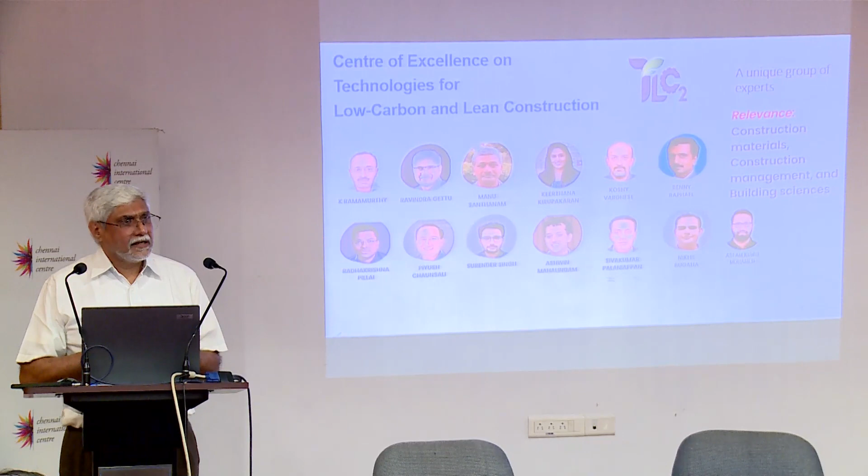A lot of young people - our average age would be about 40. I'm sort of one of the oldest. So we have a lot of young people with a lot of enthusiasm who make this group work.

So our mission, we have set for ourselves a long term mission to look at zero carbon, zero waste in construction. We want to reach a state, ideally, where we will not have any carbon impact, carbon footprint - low impact, low environmental impact, zero environmental impact, and almost no wastage. Nothing goes out when we are demolishing or reconstructing - we try to put it back into the construction.

Now why is this important? If you look at the carbon footprint, environmental impact, it is said that 40% of all the environmental impact in terms of carbon footprint comes from the construction industry. So it's huge - just one industry is responsible for 40% of the carbon footprint.

Out of that, if we have to break it up, about a fourth is operational - that is your air conditioning, lighting, heating if you may. But the rest, 75%, is embodied - that is, it lives with you, the building, the bridge, as long as you have it.

So our idea is, how can we reduce this? Because this operational part, we can make it more efficient - we can use less lighting, more efficient air conditioning, and so on. We want to reduce this 75% as much as possible, try to make it as close to zero as possible.

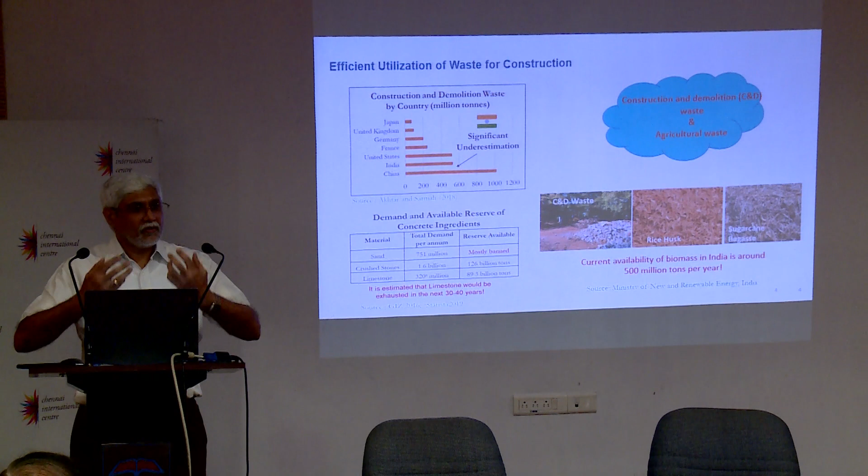We also have a lot of agriculture waste. So we are thinking, can all this be put together? Can we take waste from one sector and put it into construction, making sure that anything demolished goes back into the construction itself?

Durability is very, very important. It's something we neglect a lot. We look more at the cost initially, how fast we can construct, and then we walk away. But durability is very important, and we cannot talk about sustainability without talking about durability. Then would come demolition, C&D waste, and so on.

So some quick examples of things we have been doing. We've been looking at how to recycle concrete. We take concrete, and in this case, we zap it with solar energy. We had a huge dish that would concentrate the heat, and the heat makes the concrete disintegrate, making it easier to separate into aggregates and sand and so on.

This movie is not running, let me see. So how do we separate, how do we segregate? This doesn't work, but this is a robot that we use for segregating the waste, because it's always mixed waste. Then we are looking at different types of reinforcement. Instead of steel, which we know corrodes, can we look at glass as a reinforcement? We've also done things in the field.

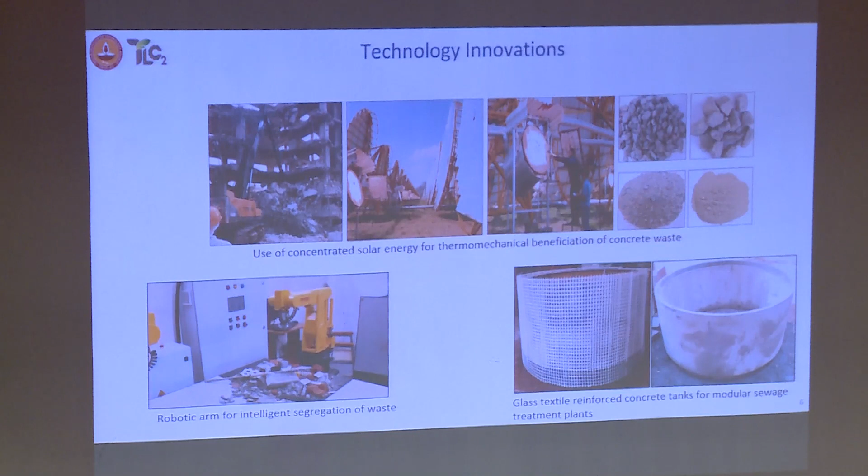It's not that we are just theoretical people sitting in the lab thinking up stuff, but we have done, for example with CMRL, gone and shown them how the pile caps that have to be dumped anyway are reused in their own construction.

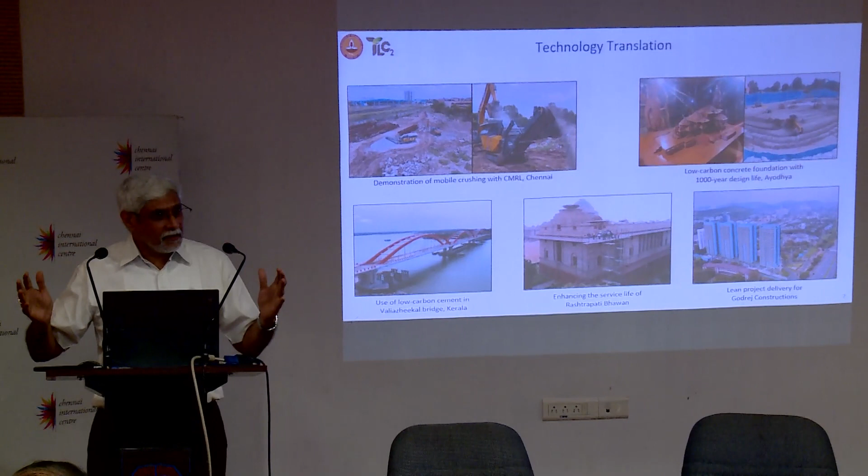We've participated in the Ayodhya temple foundation where a 16-meter depth foundation was done. You can imagine, about 50 feet. The whole temple is on a hole that is 16 meters deep. Because it is silty soil, I can talk about it later, but we had to build it up.

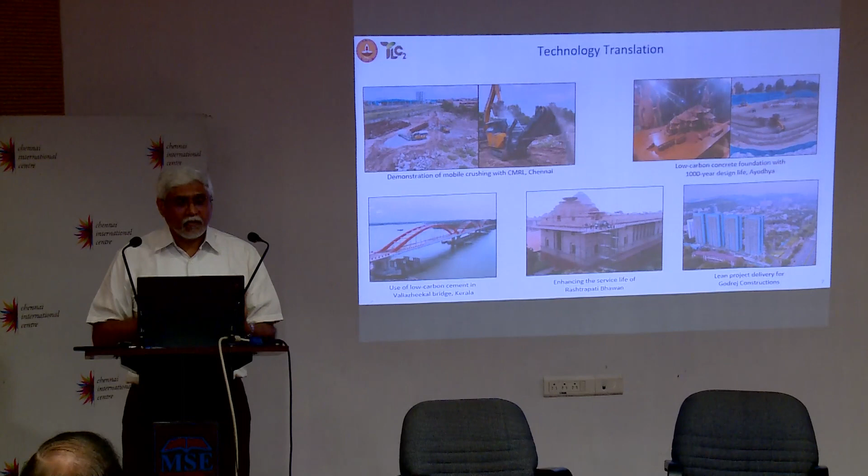Again, low carbon, a lot of fly ash used, very low intensity concrete. We've introduced low carbon cement, slag and fly ash in a bridge in Kerala. The Rashtrapati Bhavan is also being revamped.

There are chajjas made out of lime concrete very early on, which are all deteriorating. So instead of pulling it apart, we've seen how to rehabilitate it. With Godrej, we've looked at lean project delivery.

So all this fits into these sustainability goals. This is my last slide. I want to show that there are a lot of options we have to work on. Sustainability is much more than carbon. When we are talking about all the sustainability goals, we have to think of all these things.

Construction fits into many, many aspects. Construction is responsible for many aspects that govern sustainability, and we have to think about all this. So that's where we are. And in this list, new construction technologies or lean construction technology is very, very important.

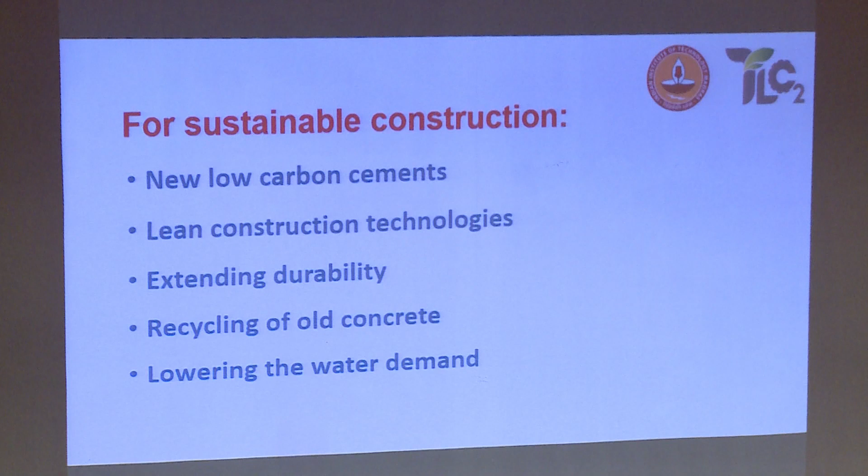So you will hear from an expert from a team that has done amazing work in our country, and you will see how they've taken it forward and what is the future of this technology. I'll stop there, and I have the pleasure that Mr. Hebbar continues and will tell us about these technologies. Thank you.

Very good evening to all of you. I think the expectation is very high. Professor Ravindra, Mr. Anand, Mr. Challa, everybody is telling that a lot of expectations are from this forum. I don't know if I'll be able to do justice, but one thing I'll sincerely try. Most of you must have had a very hectic day, it is very warm outside and a very cool temperature inside, and I'll try my level best to keep you awake till 7:10.

In L&T, we always think ahead of others. I would say we are the trendsetters. If we can't do it, who else can do it? So we challenge ourselves to keep ahead of the market and give solutions for the better future.

In this context, L&T has come out with various solutions in the construction industry. Just before getting into more detail, I'll briefly explain what L&T is about. I think L&T needs no introduction. If I have to tell about L&T, it is like taking coal to Newcastle to this august audience.

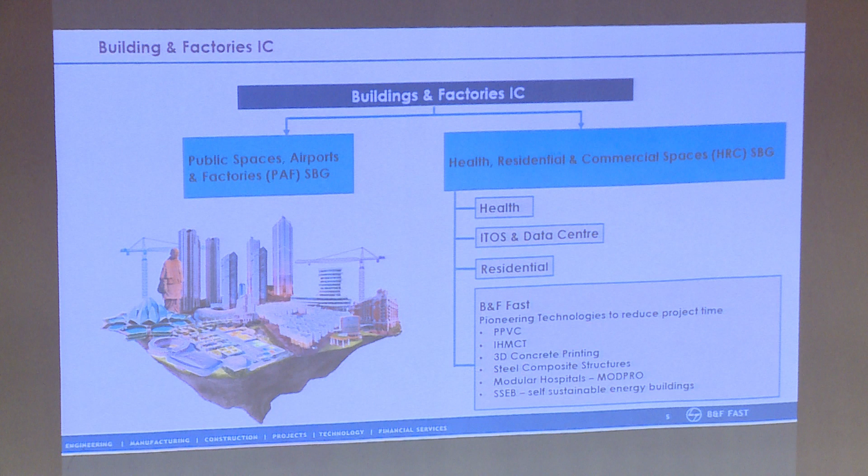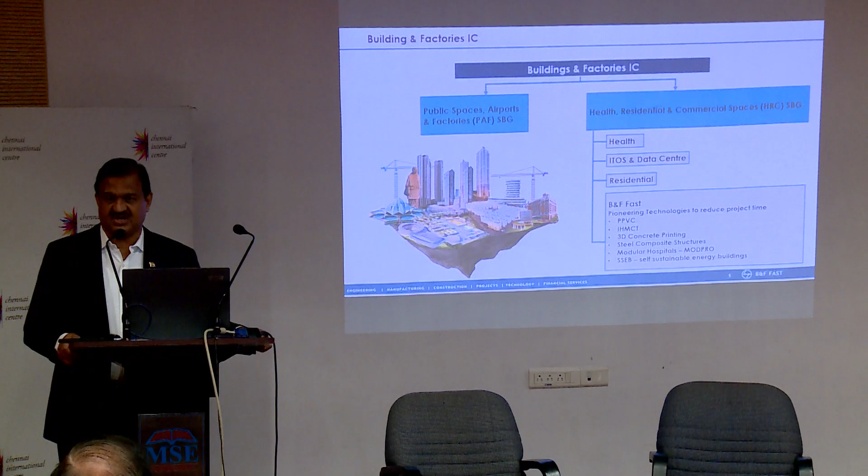One is called 3DCP, that is 3D concrete technology and printing. The second is PPVC, prefabricated pre-finished volumetric construction. We also thought of self-sustainable buildings, still in a very primitive stage, but we are doing close interaction with the central government - for projects at high altitude where there is no electricity, we have to make the building run on its own energy. It's still at research level, along with various other initiatives including steel composite structures.

What is our vision? I'm sure most of you are in the construction industry, architects. Just for your information, I'm an architect by profession, but I'm doing business now. Maybe 20 years I did the design, and for the last 15 years I'm doing business. Engineers, structural engineers, and many of you are developers.

One of the biggest problems we are facing in the industry is skilled workforce. Very, very difficult to get today carpenters, barbenders, and masons, resulting in very poor quality of work. Uniformity is hardly there.

All these things, when we look at it, and on the other side, if I have to compare my product with a machine-made product like a car, you go to the showroom, look at a Toyota car or Hyundai car, see the brochure, see the specifications, and ask for a car. You get the car exactly what is mentioned in the specification, what is available in the showroom.

And now you go to a contractor. Architect has designed the drawings, and then he has given the specification, and go to a contractor and ask him to construct. At the end of the day, you get a building which hardly matches with the specification and design given in the drawing. And the architect is not happy with the contractor, neither the end user.

So why not we develop a product which is exactly the same as a car, in the sense it 100% matches with the specification and the design given by the architect. In other words, I would call it the architect's magic wand. Is it possible? Yes. We have tried our level best and maybe we have reached at least 85 to 90% of it.

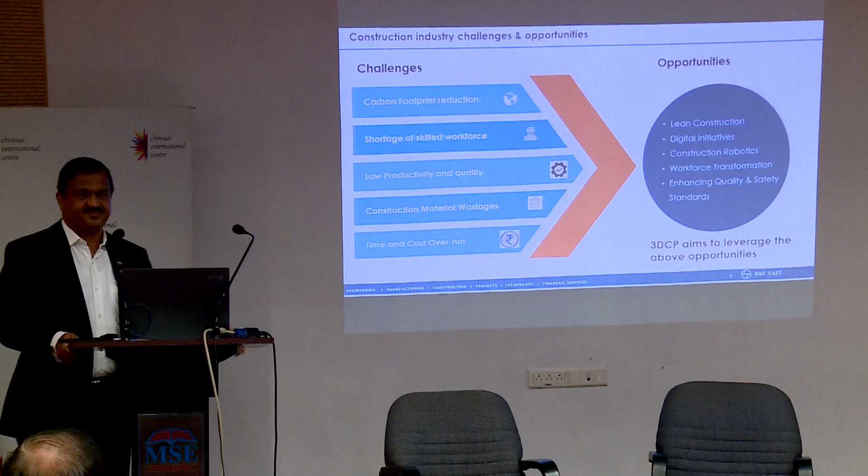Huge challenges we have. It is not as simple as mentioned. Professor Ravindra has given quite a lot of information about carbon neutrality and carbon footprint. Today, if I'm right, construction industry is one of the biggest contributors of carbon dioxide into the atmosphere. Everything we do generates carbon dioxide.

Labor comes from different places. We run a lot of plant and machinery at site, and every resource is taken out of Mother Earth—bricks, steel, everything. So I think we are the biggest culprits. Shortage of skilled workforce, I already told you. Low productivity and also low quality.

Construction material wastage—many times we produce concrete in the batching plant. By 7 o'clock or 6:30, all the labor want to go home, and a lot of product is still available in the transit mixer. It is dumped somewhere below the ground, and it is not getting paid for by the client. Also, at the end of the day, the contractor makes a loss. Of course, that is one small wastage.

A lot of wastage is there, including formwork material. And at the end of the day, it is time and cost overrun. Hardly is there a project which is completed on time. Say 24 months duration for a project, and most of the time, including in L&T, we find it very difficult to complete the project on time for various reasons.

It may not be just because of the construction methodology. It may be because of changes proposed by the client, or maybe sometimes material has to come from abroad and logistics is a problem, but there is a time overrun resulting in cost overrun. So all these challenges—if I have to address them, I'm not saying 3D printing is the only solution, but today, to a large extent, I think that is the way forward.

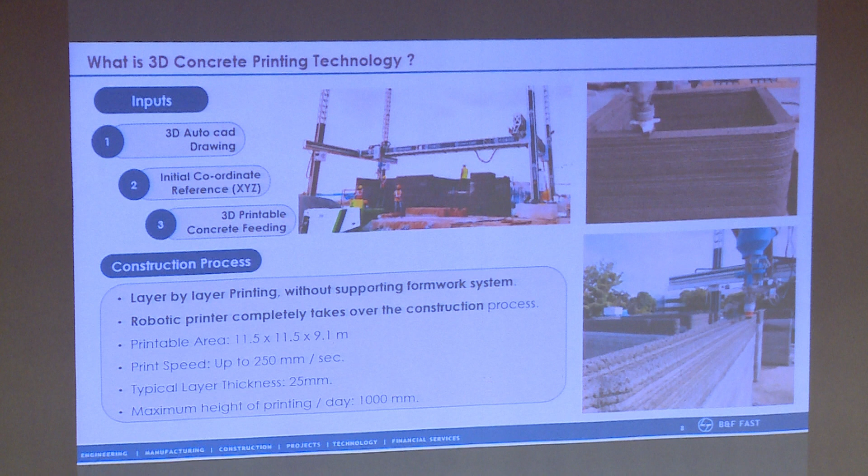250 millimeters per second is the speed at which the nozzle, the print head, works. The thickness of each layer is approximately 25mm, and per day, 40 such layers of 25mm means 1 meter of wall height can be constructed in one day. That means for a building of 3 meters, it hardly takes 3 days to reach the roof level.

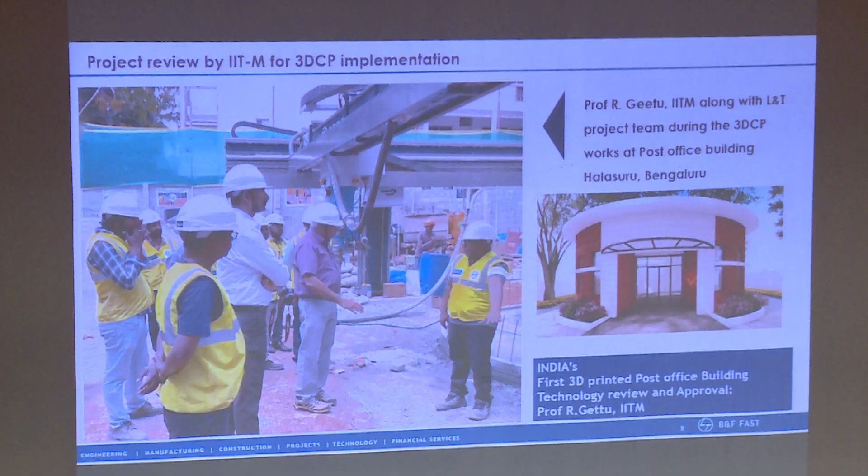That is one of the projects which we have completed in Bangalore, whose photo shows Professor Ravindra at our project site. We did one post office building at Bangalore, Ulsoor Road, 1,000 square feet post office. 44 days was the duration given in the contract, and we completed it in 43 days.

I think instead of me talking, an audio visual will be better.

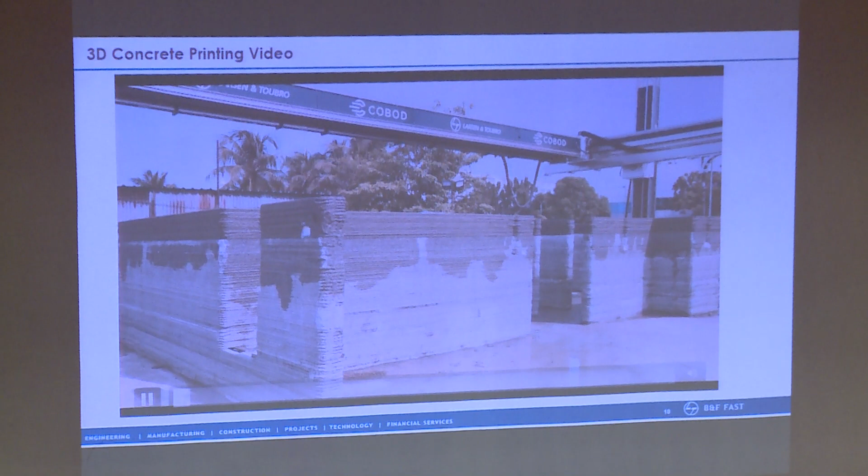With 3D concrete printing, the future of Indian housing. As proof of concept, we first 3D concrete printed a single-story building.

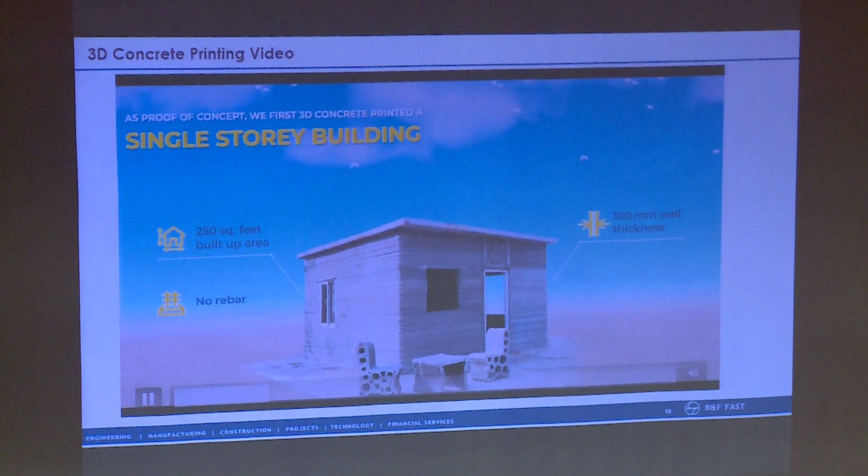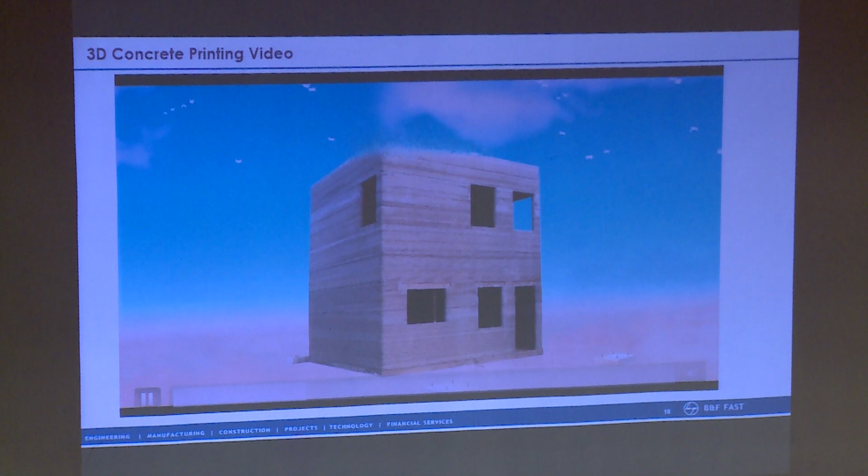Then, we 3D concrete printed India's first ground plus one building. Now, we have 3D concrete printed a full-fledged flat.

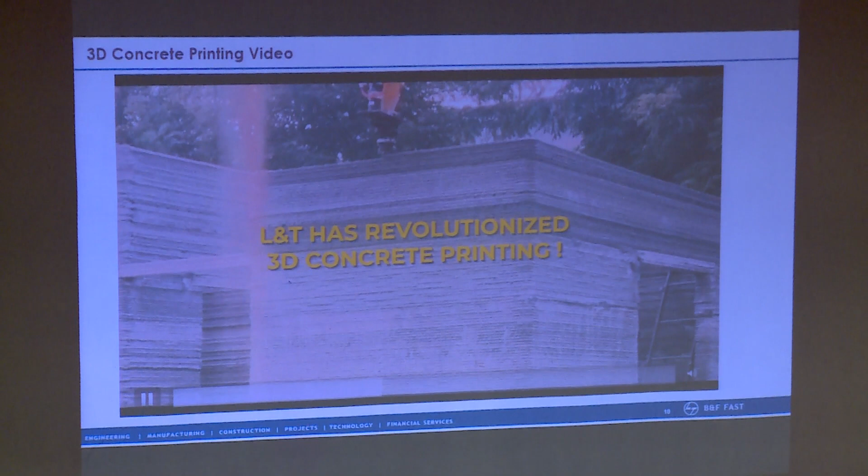L&T has revolutionized 3D printing technology by engineering a concrete mix with locally available construction material and developed ingenious methods to integrate reinforcement. Specialized concrete is a paradoxical combination of properties that ensures pumpability, flowability, green strength, and buildability. Both horizontal and vertical rebar are embedded in the printing.

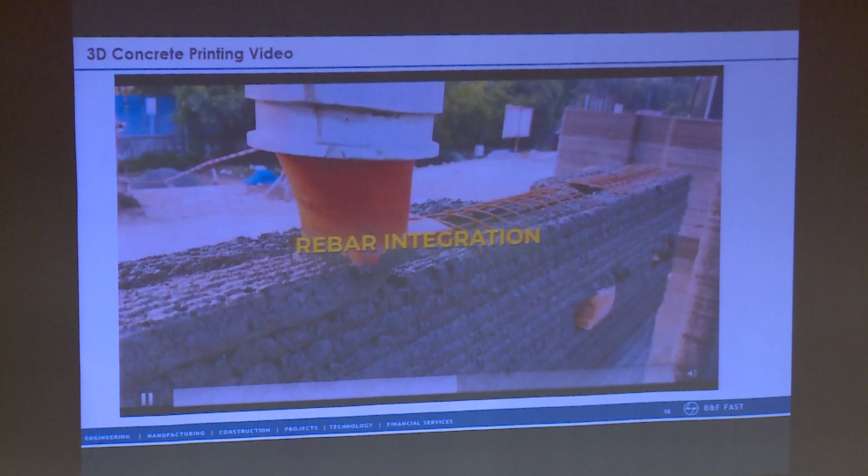3D concrete printing has several advantages over conventional construction.

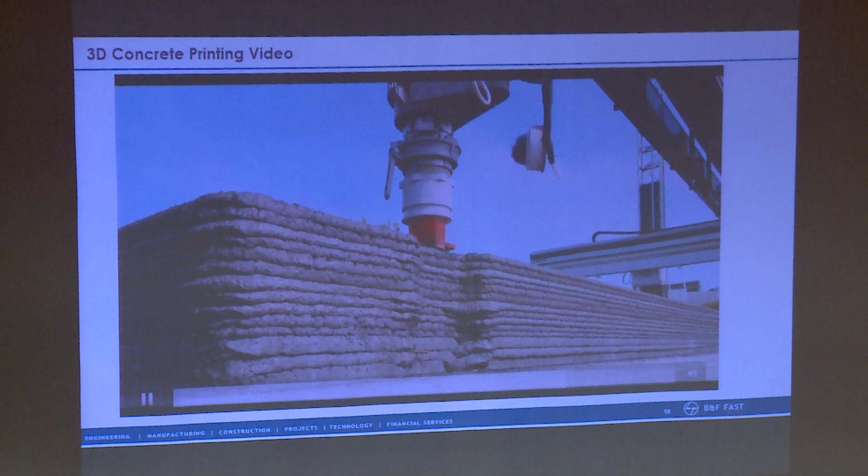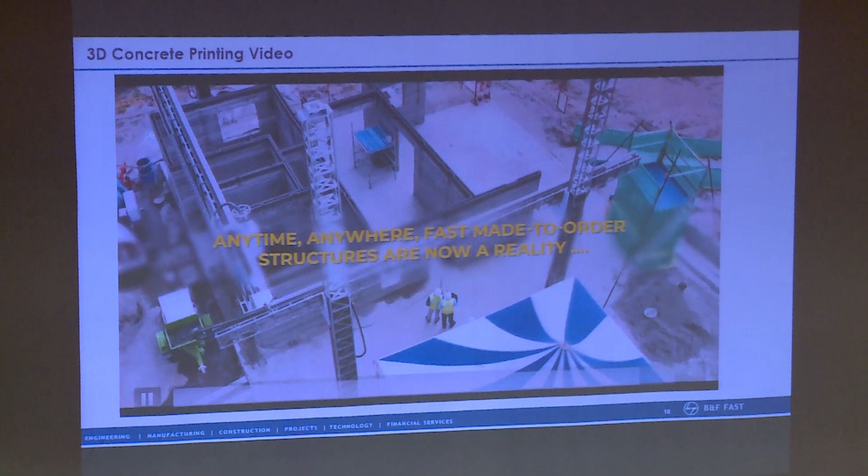We are now ready to build up to 4-storied buildings, mass housing, villas, factories, and more. Anytime, anywhere, fast, made-to-order structures are now a reality, thanks to our expertise in 3D concrete printing.

So 3D construction and printing has 3 M's: machine, material, and methods. First of all, machine, we need a 3D concrete gantry girder or robotic arm, whatever it is. It depends on what type of product you are looking for. Then of course, batching plant to create the mix, and concrete pump.

As far as material is concerned, there are various materials like cement, silica, some additives, concrete mixture. Of course, that is a trade secret, so nobody will give you exactly what the concrete mix we are developing is. And then, of course, the methods, how exactly we'll have to do it, how the whole product will come up.

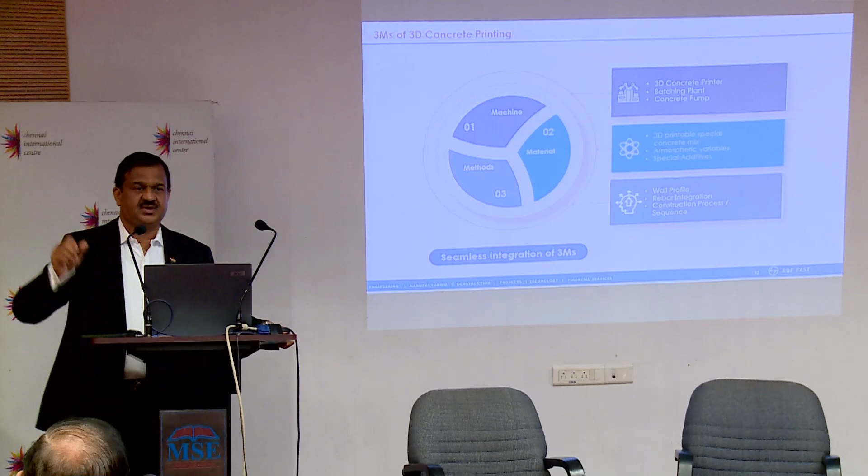So first is the concrete mix. What do we do? Basically, we have to make sure it has got workability, meaning it has to be somewhere a little thinner, but not very thin. Somewhere I would say it is like a paste, going through the nozzle. It has to go through the nozzle, so it has to be workable. Free flow should be there.

And then it should have some kind of shape retention. We put the first layer, and after that there is some time for it to get some strength, and then the machine goes one full round and comes to the same position. By the time, the first layer should have enough strength to take the load of the second layer. So the shape retention is also a very critical aspect we should keep in mind.

And bonding, it should be tender enough to take some kind of bonding with the next layer. The first layer will happen, and after some time the second layer will come. At that time it should be tender enough to take the bonding with the next layer. Of course, buildability.

These are the various components: cement, fly ash, of course silica, then crushed sand, 5mm downsize. This is where actually the cost is slightly going up. If the technology improves and if we can go for 10mm downsize, then we can further bring down the cost.

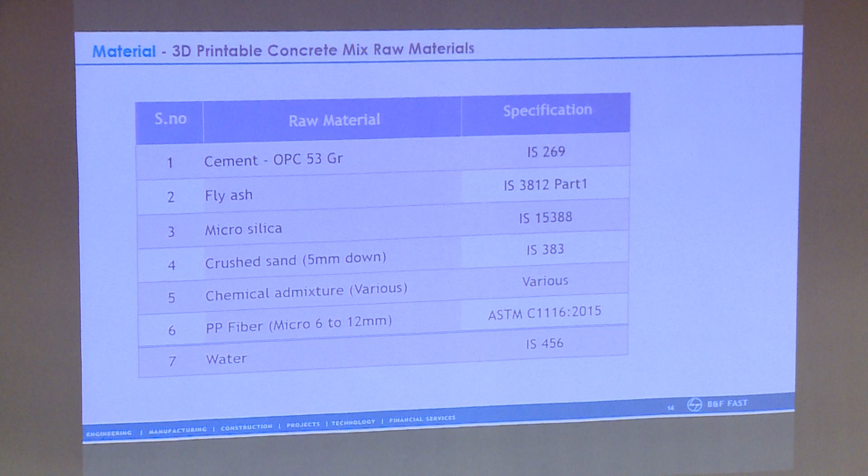This is a wonderful project, almost 100,000 square feet of built up area. 55,000 square feet of built up area is given on precast technology. 45,000 square feet of building is given on 3D printing technology.

And we have to complete it in how many months or how many days? 45 days? No. Since it is 3D printing, they gave us time approximately 4.5 months. And for the precast, they gave 8 months. And I'll tell you the story.

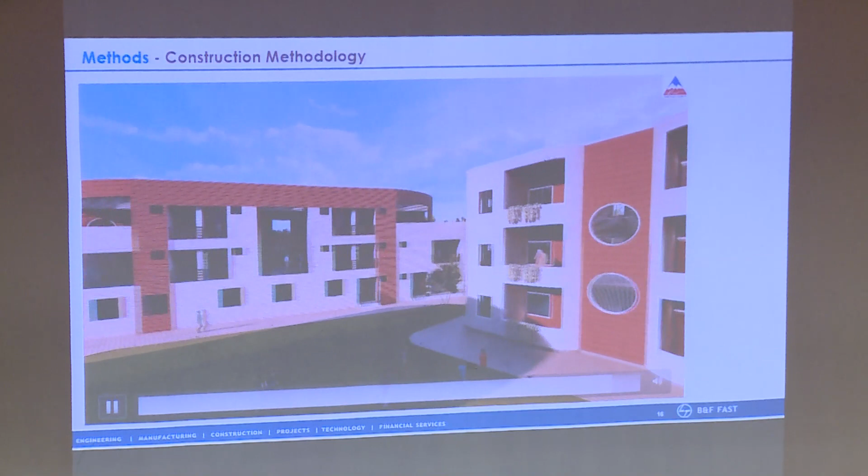How exactly do we construct the substructure? If it is a strip footing, we do it in 3D. If it is a raft, we'll be doing it in situ construction. Superstructure will be completely done in 3D.

For the slab, either we can go for precast hollow core slabs, or even conventional slab, but there is no meaning because the very purpose of going for 3D is going for fast construction. If it is a ground floor structure alone, then we can go for structural steel.

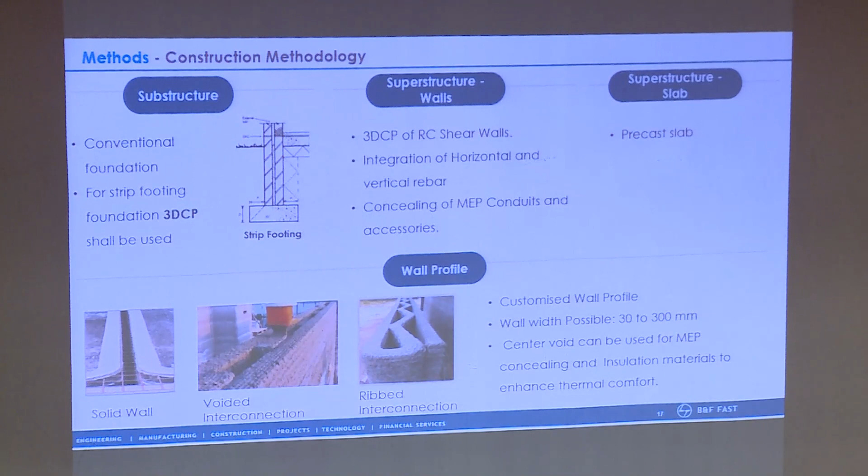The wall will be having a void in between, approximately 100 mm, maybe around 40 mm, 40 mm, and in between a gap of 30 mm, something like that. This gap can be used for two things: one as a thermal insulation material so there will not be heat radiation, or when we do a lot of MEP works, the MEP conduiting can be pre-planned and fixed in this void.

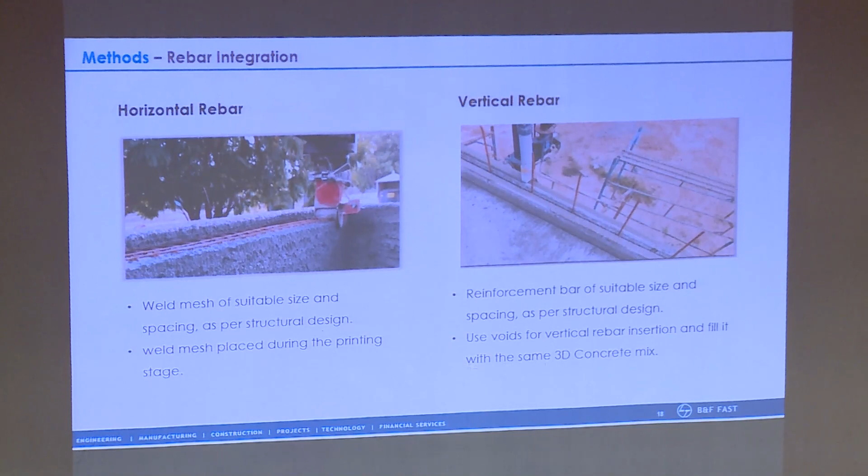So horizontal rebar will be tied while doing the 3D printing itself. Verticals we can place for getting better strength. We can also use different types of lintels.

When we do the MEP works, we can pre-plan it, and while doing the design itself in the 3D drawing, if I provide a niche, the printing also takes place in the same way, so that in that niche you can keep all your conduits, and later on do some kind of gypsum plastering. Or else in the void, as I said, you can place your conduits.

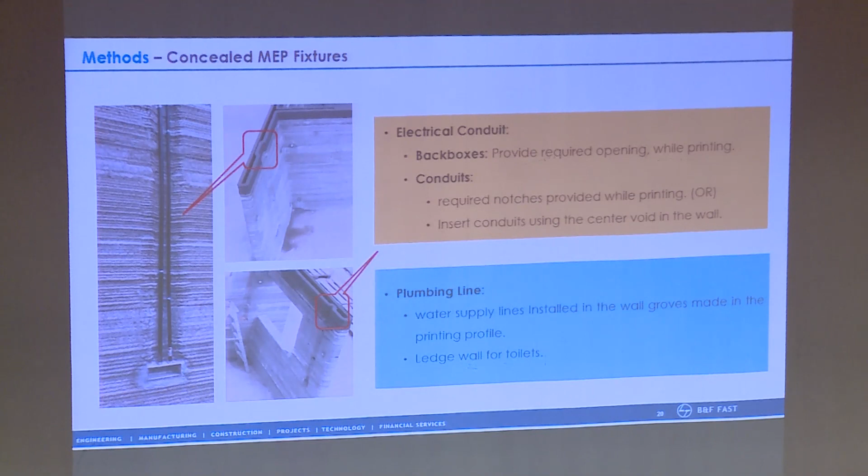Depending upon what type of product you look for, you have two different types of machines available in the industry. The first one is basically meant for small architectural features, like you would like to have a small chair, or some kind of street furniture, or maybe a flower vase. Then it is called off-site printing.

That means you will be doing it in some factory, where you have a robotic radial arm. So we'll be using this kind of small setup. Quite a few types are available in the market.

But the other one is called gantry type, which will be used basically for on-site, meant for the construction industry. There we have two types: basically the first one is gantry, second one is rail. In the rail, the advantage is instead of an 11 meter span, lengthwise it can go for much larger distance.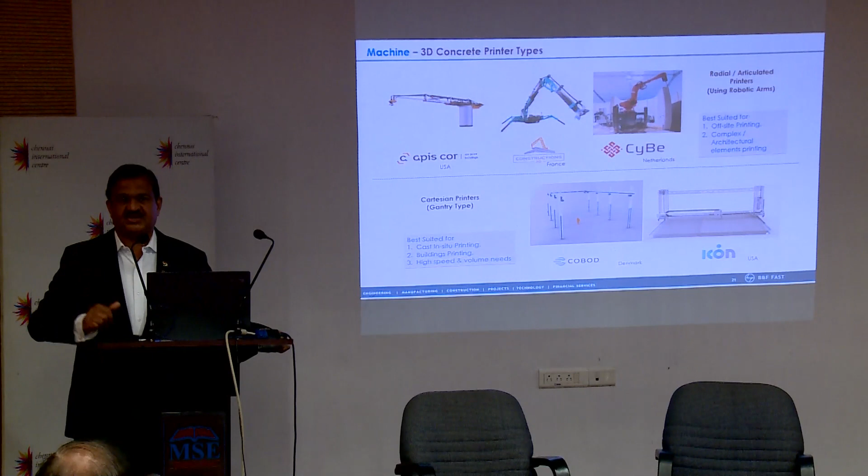So as I said, it will be having all X, Y, Z axis. That is why I said 3D printing is a magic wand. You can have any funny shape and the machine goes in exactly that shape, and you get what you have imagined. It comes from the paper into reality.

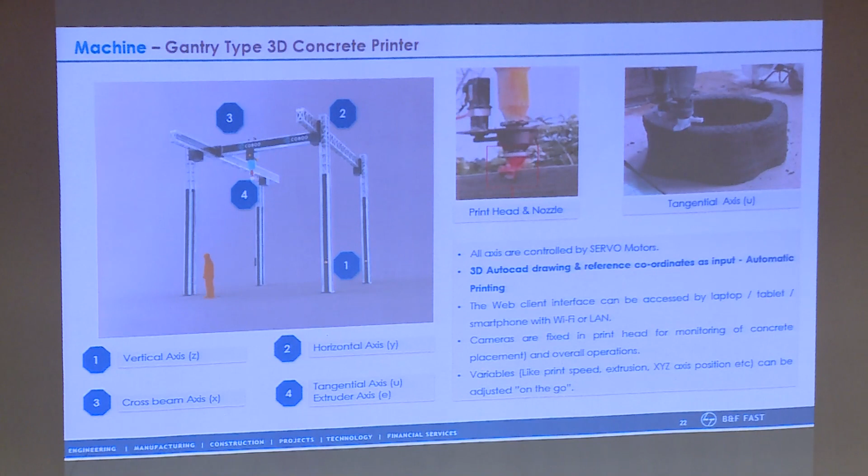Our journey, I said, around 3-4 years back, we thought that we should get into 3D printing. So initially we started doing some research in our own laboratory. We started preparing the concrete mix, and when we were sure this particular concrete mix will work, we took a very humble way - a water bottle, put the paste inside, and by pushing by hand, layer by layer, we thought that we will be able to do it. And we were able to do it. So we got confidence, yes, something is possible.

So then we wanted to try in a machine. In India, those days, we didn't have a 3D printing machine. So we went to Dubai, had a tie-up with the manufacturer, and in his factory we gave our concrete mix, and that is how the second one - a small water tank of 1 meter high - we could get it done. So that was the first taste of success, and there was no looking back.

So we came back to India, and then we hired a concrete 3D printing machine, and we did the first ground floor structure in Kanchipuram. It is a mock house, and we got the confidence further, and then we went for a G+1 story structure.

So all these things when we did, two people were behind us. As I said, first is IIT - IIT gave us the certificate for the suitability, buildability, and strength part of it. And second was BMTPC, that is Building Materials and Technology Promotion Council of Ministry of Housing and Urban Affairs, Government of India. Actually, there is no IS code or NBC which says this is the way this has to be constructed, and codal conformance is that kind of a part we are still developing. We are also part, and IIT is also part of this council. We hope we should be able to come out with the codes very shortly. But till the codes are published, this is how we can make it work in the construction industry.

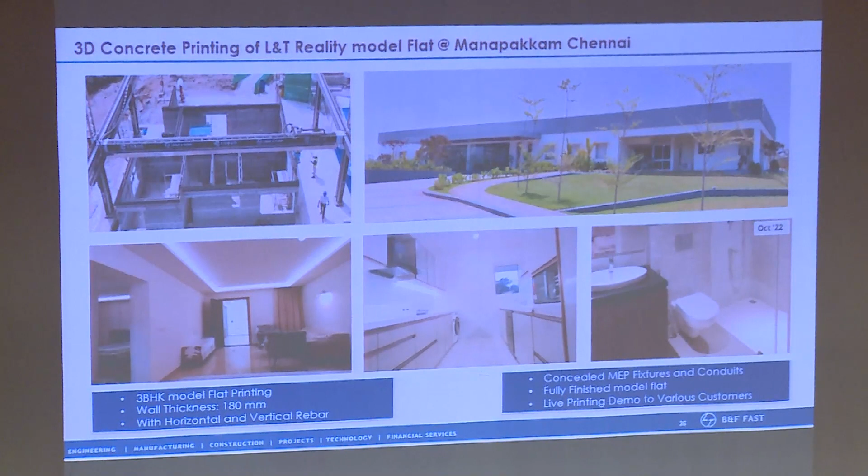Some of the other projects which we have constructed - this is just across our headquarters in Chennai, near Manapakkam, where we are doing almost 10 million square feet of commercial and residential space. It is a walk-to-work concept, and there we have done one model house for people to come and see exactly what they get. This house was constructed with 3D printing. And the person who constructed it is here, Mr. Vadivalaga - can you just get up? He's the one who executed this particular building, and it also came in a Hindu newspaper that time.

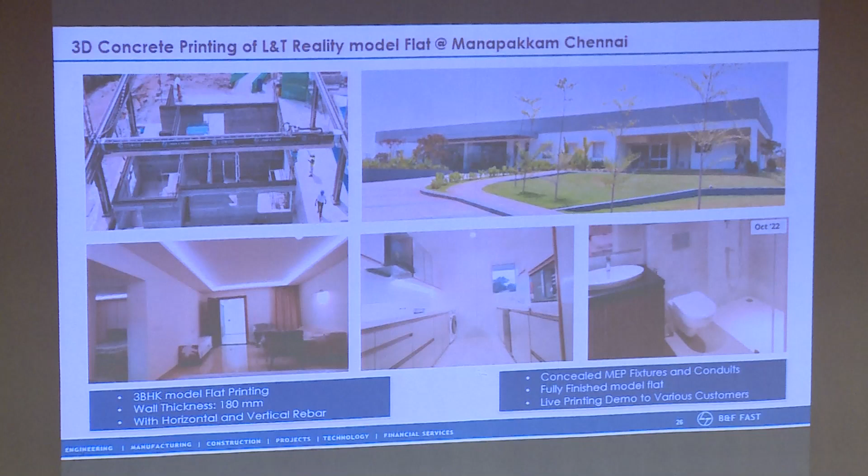You can see the interiors as well as the exterior. Generally what we do is on the exterior surface you can see some kind of roughness - not unevenness, but roughness. It itself gives you some kind of texture, and we leave it as it is. So that gives a beauty, and people also would like to know, yeah, this is a 3D building. But when it comes to the interior, it would be better to have some very thin layer of gypsum plaster so that it becomes a little smoother. So if somebody wants to have a backrest on the wall, it would be better to have some kind of smooth surface.

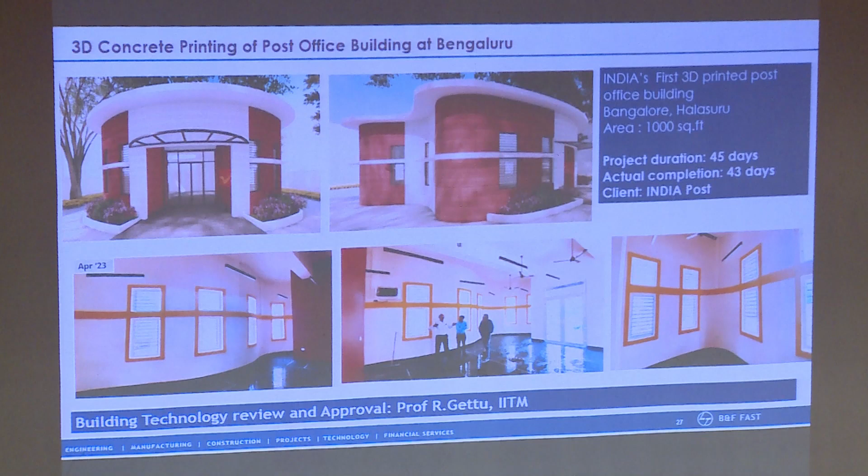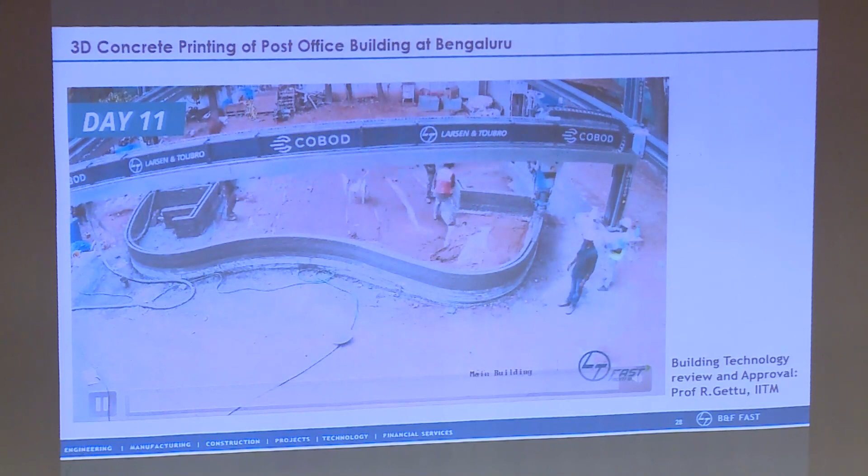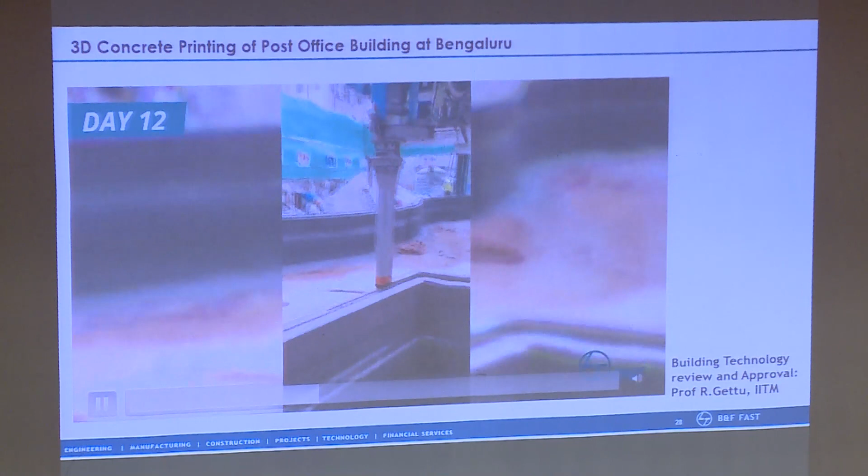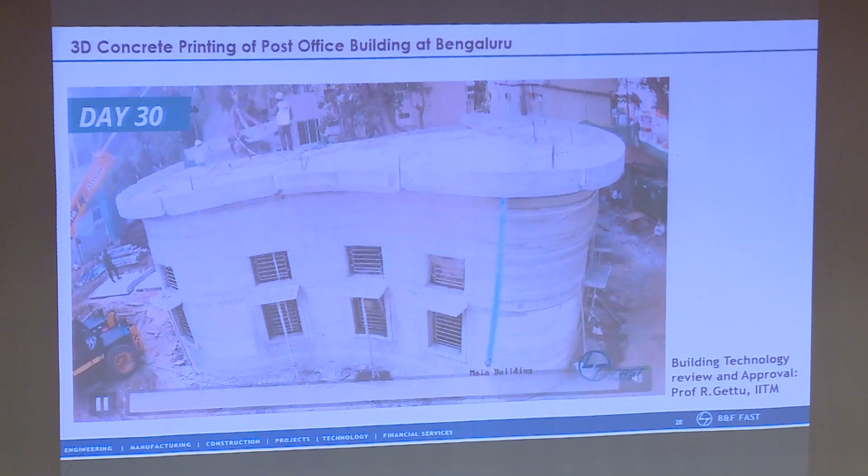This is the one I mentioned, the 3D printed post office. The top one is a 3D view, but the bottom one is the building exactly as constructed. Yeah, so this is the building.

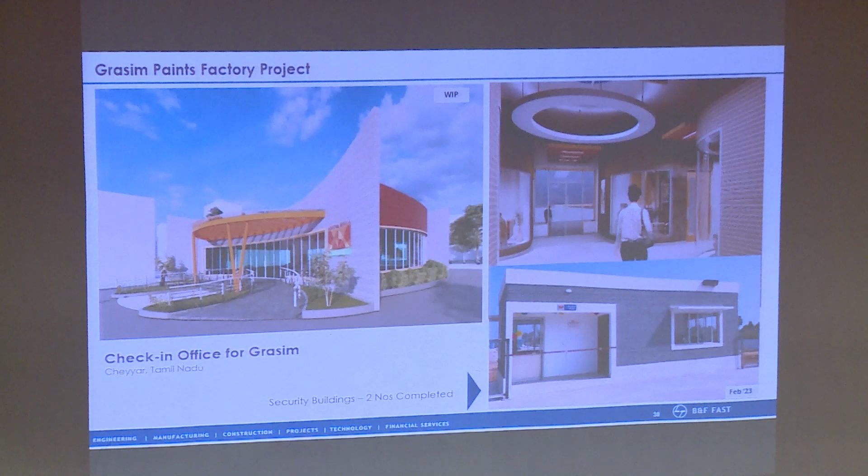So next one is at Cheyyar near Kanchipuram. We did this for Grasim cement - for them we did Grasim paints, and for them we did a factory. That is a small security and one more check-in office. It is under, well, the bottom one - what you're seeing is what we constructed.

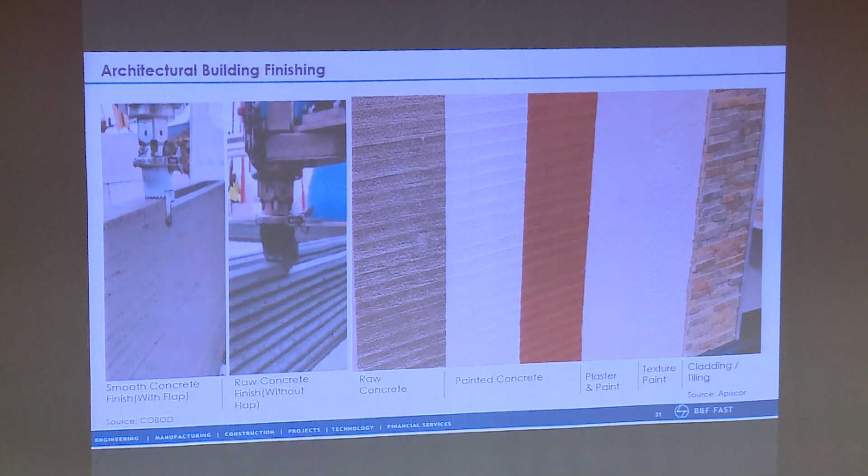So we can get different textures on the surface. You have to add a shaver while printing itself so that it shaves the rougher part, so that you can get a smooth finish. Or if you don't want smooth finish but want some texture, that blade can have different types of cutting, so you get different finishes. This is one of the finishes - what you see on the left-hand side is a smooth finish, the next one is a regular finish, the third one is some texture. We try to do it, and then you can do any kind of painting, and you get the look of any conventional building also.

So what exactly is the advantage and what is the way forward? When I say that if it is a conventional construction, it takes approximately 8.5 months, and this takes approximately 4.5 months. That means approximately 40% we can do faster.

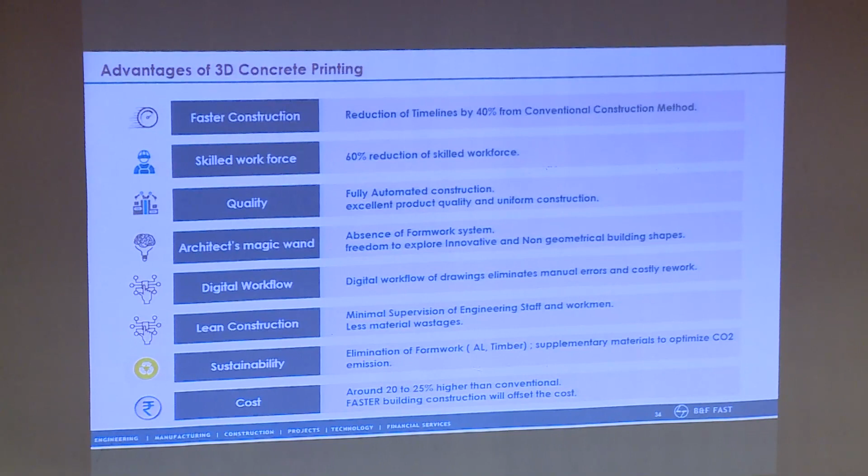It will be much easier, less workforce. Of course, many people will look for what is the cost. I'll come to that a little later. So advantages: first of all, faster construction, much faster. Skilled workforce is not required, so we need engineers and maybe some foremen, but not skilled workforce at site. Quality is very uniform. Architect's magic wand, I already told.

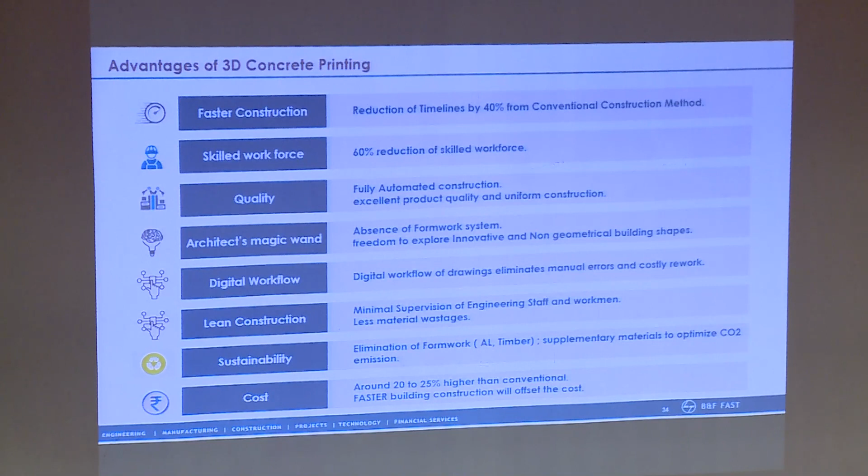And then digital workflow. Whatever is done on the AutoCAD drawing, exactly that gets printed at site. Lean construction, very less workforce at site, very less staff, no need of supervisory staff, no need of too many engineers at site. So literally it is lean construction.

And of course, the moment there is lean construction, you can save a lot of carbon dioxide. So carbon neutrality also comes into the picture. At L&T, we have taken a decision that by 2040 we have to become carbon neutral, and by 2035 we have to become water neutral. Government of India has announced that by 2070 we have to become carbon neutral. We have taken it much ahead of that schedule, but of course, long way to go.

And these are some of the initiatives which we have taken in this regard - sustainability, and of course, the cost. As of now, today the cost is approximately 20-25% costlier. I'm telling like this - don't talk about the entire project cost.

Now, which part of the building is getting substituted by 3D printing? The substructure remains as it is, assume with conventional construction. When it comes to the superstructure, the entire masonry wall and plastering goes off and you construct with the 3D wall. And for slabs, instead of conventional, I would like to go for precast because that is how the speed will be maintained.

And then assume I will go for a G+2 storey structure. That would be the minimum volume of work required so that the gantry, which is hired at approximately 1.5 crore per annum hiring charges, if I'm hiring it, I should get some volume - then only it becomes somewhat economical. Then it becomes approximately 20% still higher compared to the cost of these elements.

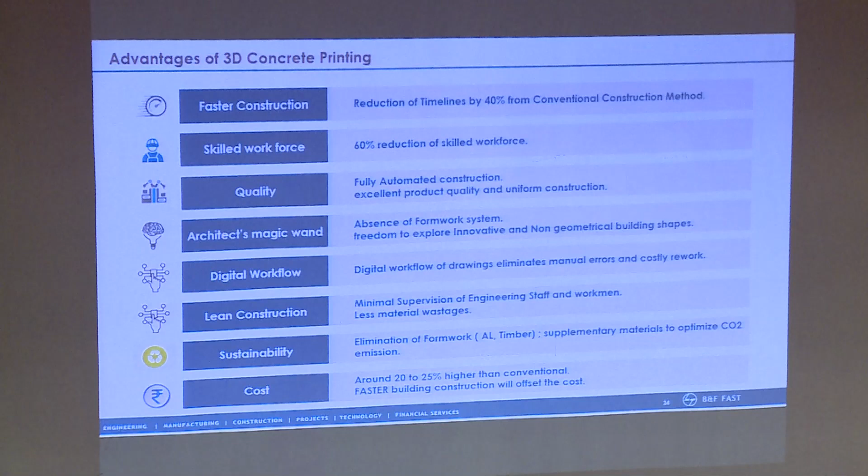Now, if you're looking for a residential house, generally it is not for revenue generation - it may be for self-occupation. Then you may like to wait for 2-3 months. You can wait, but think you will be paying that rent in your old house. So if you're getting this house 6 months ahead of schedule, that means you will be saving that much of rent, and that is one of the advantages.

But when it comes to commercial buildings, there is huge advantage. If a developer is getting a building constructed in 12 months, and that same building is getting constructed in 6 months, for that built-up area, today rental may be around 200, 250, 300 rupees depending upon location - there is huge revenue generation. His payback to the bank loan, everything becomes 6 months or 8 months ahead of schedule. That is how the volume and speed helps them make it more economical. So maybe he can afford to pay a little more to the contractor, isn't it?

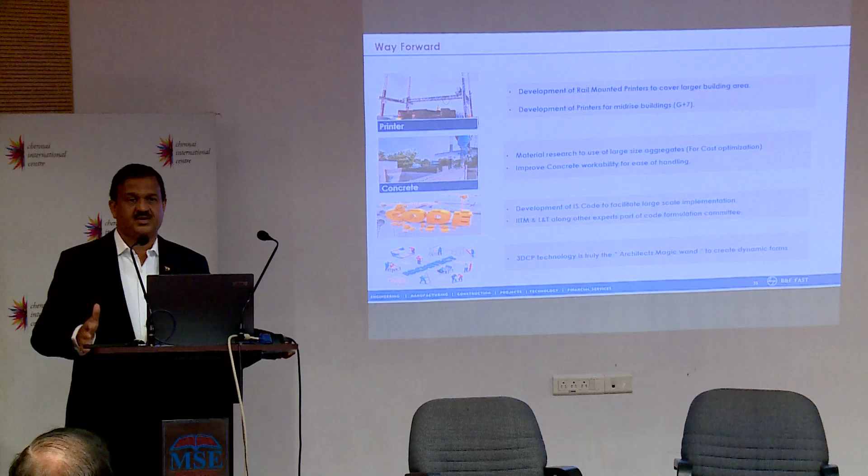So the way forward is, I would say we have a long way to go. I would say miles to go before we sleep, miles to go before we sleep. We have reached some stage, but 11.5 by 11.5 is not a big size, especially for L&T. It is definitely not a big size. We would like to go for at least 10,000 square feet of footprint, maybe a G+7 storey building.

That means 70,000, 80,000 square feet - then it really works. 1,200 square feet into 3 floors is 3,600 - volume is not enough. And really, if we are talking about carbon neutrality and all those things, with 3,000 square feet what exactly can you make? So we need volume. We have to really go for a much bigger gantry, much higher height, maybe around G+7, 40 meters we should be able to achieve. It will definitely have a lot of impact.

Rest, of course, is code, we are already on the job. And I said about architect's benefit.

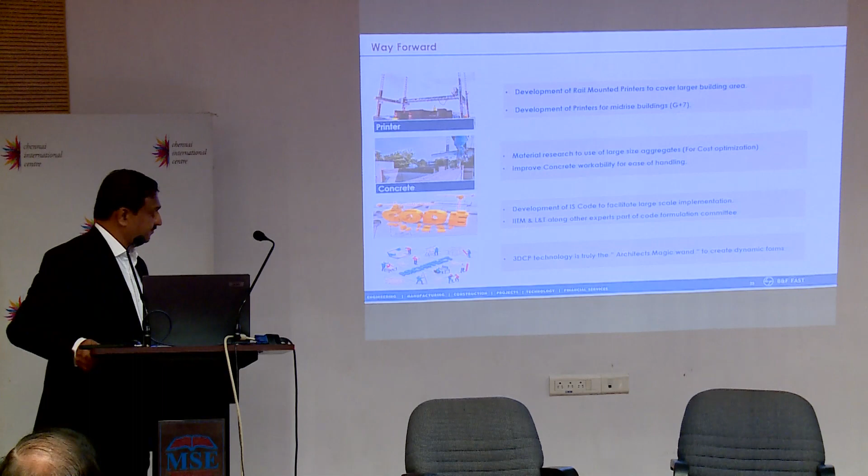Having said that, I thought I'll just take a few minutes. PPVC, we have done a little bit, but I'm humble enough to say we have not yet executed a job fully on PPVC technology. We are in a very primitive stage. Professor Ravindra is guiding and motivating us, but it will take some more days or weeks to make it a reality. Maybe next time in this forum I would like to present it, but not today. But yes, we have done PPVC in one part of the building, not the building as a whole.

PPVC is prefabricated, pre-finished volumetric construction. When a building has a lot of modularity - for example, a hotel with 100 rooms, 10 rooms per floor, G plus 9 stories - one room will be constructed completely off-site in a factory, fully finished including wall, tiling, toilet, everything done. It is put on a container, brought to the site, lifted by a crane, and fixed into its particular location. That is prefabricated, pre-finished volumetric construction.

That means overnight - the previous day when you go across the road, you see the building below the ground. Next day morning when you come, it has come up to G plus 3 floors. It is a miracle. It is happening around the globe, but we haven't reached that yet, though we are working very seriously on it. Maybe 6 months down the line it should be a reality.

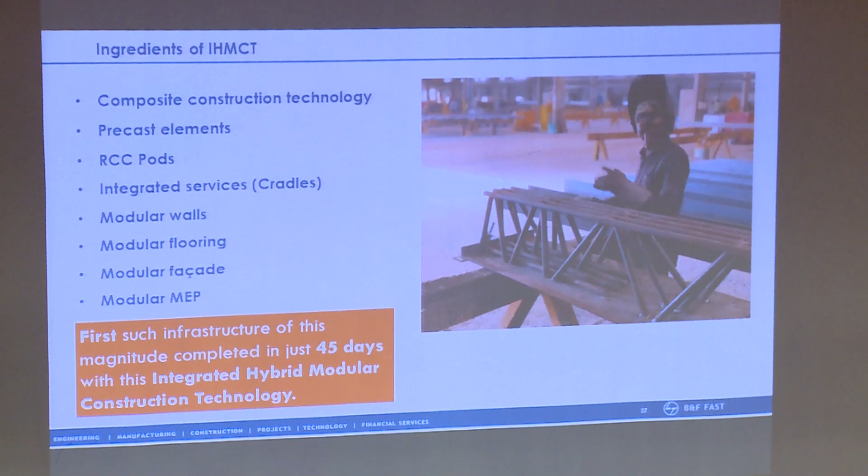Then the next 45 days, you simply erect it like a machine. This is what we did, and yes, we did it - I think you will see that today. That is the building we did: 130,000 square feet, 30 meters by 60 meters footprint, each floor height 4.5 meters. We did it in structural steel - actually it's a composite structure too.

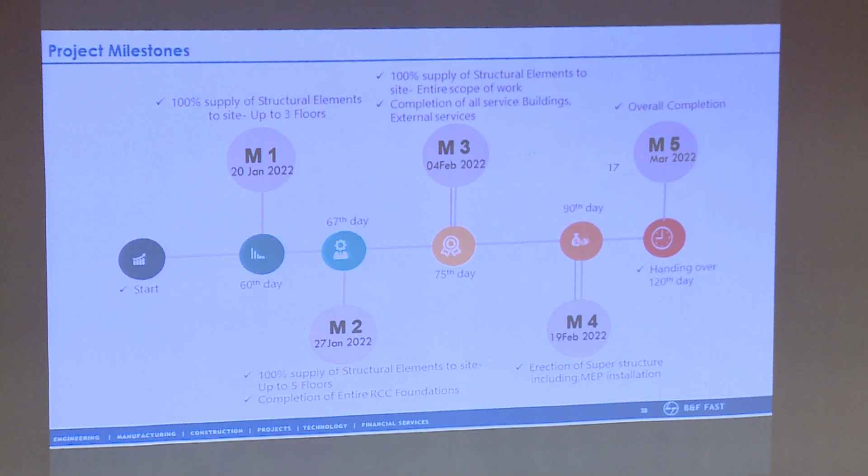Total time duration, as I said, was 120 days. By the 60th day, we had to bring up to the third floor 100% structural elements - it's a G plus 6 story building. By the 67th day, up to the 5th floor, and by that time we had to complete all the substructure works. I could not start the superstructure until the foundation was done, and then by the 75th day 100% of elements should be available at site.

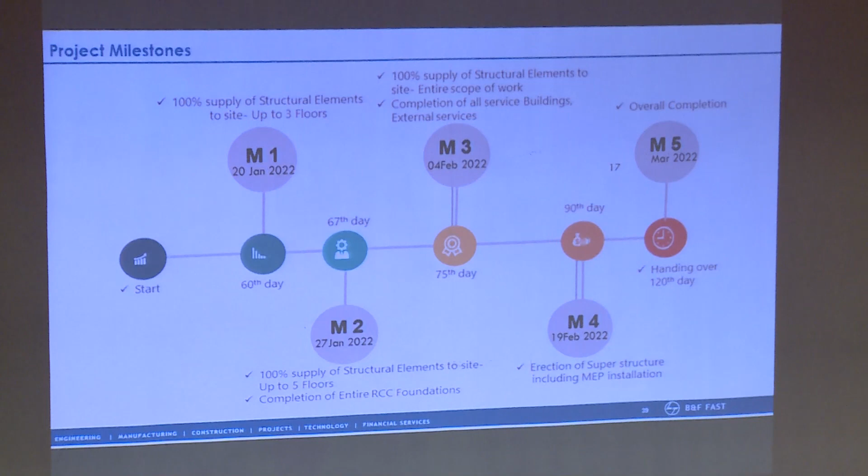From the 75th day we start the work at site. By the 90th day I complete the entire superstructure and also install the MEP works. By the 120th day, testing, commissioning, and handing over. The project was inaugurated by the Defense Minister, Mr. Rajnath Singh, on the 120th day. That is what we did.

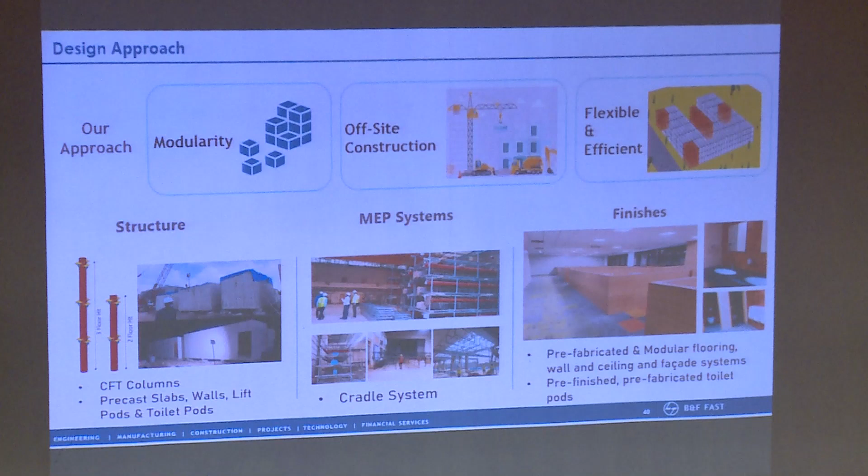100% modularity - everything was modular. Imagine even the MEP part was done modular: the entire piping, ducting, cable tray, everything was pre-planned and fixed at the factory, like a cradle system we brought. The cradle was lifted and fixed onto the structural element before the slab was cast. Generally we cast the slab and everything hangs from the slab, but here we went a different way - first we fixed the entire MEP part and then did the rest.

That is the finished look of the building, including finishes. When we did the facade panel, it had the internal wall system already fixed onto the external - glass on one side, and on the internal side maybe veneer or some kind of drywall partition, whatever was required, also fixed onto the same panel. So when you fix it, the wall is also done. These are the toilet pods - this is exactly the PPVC pod, meaning the toilet.

Actually, the toilet takes a lot of time. We have to do the waterproofing, then the piping, then the tiling, and finally we fix all the CP and sanitary fittings. And that takes a lot of time in any project.

So what we did was the entire toilet was precast in the factory, in the yard, and every item was fixed onto it. We had to work out a few things: first, what is the total weight, whether my crane can lift that much weight. Then logistics, how far is that yard and how much time it takes to bring that thing to site. Sometimes we even have to cut trees, and since that is not in our purview, we have to inform the BMC that this particular branch may have to be cut so the container can move.

So we did a trial run on the first day to identify the places we have to cross and where all the hurdles are. This was done on the 75th day. On the 75th day, the material reached site after one or two branches of the tree were cut.

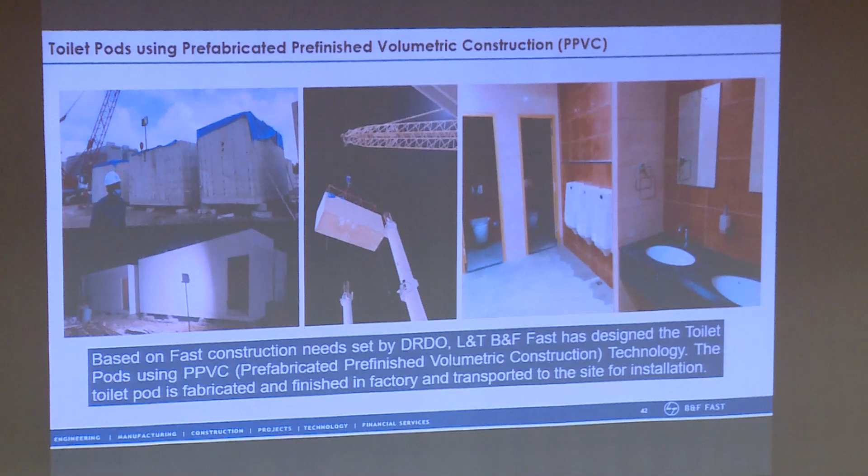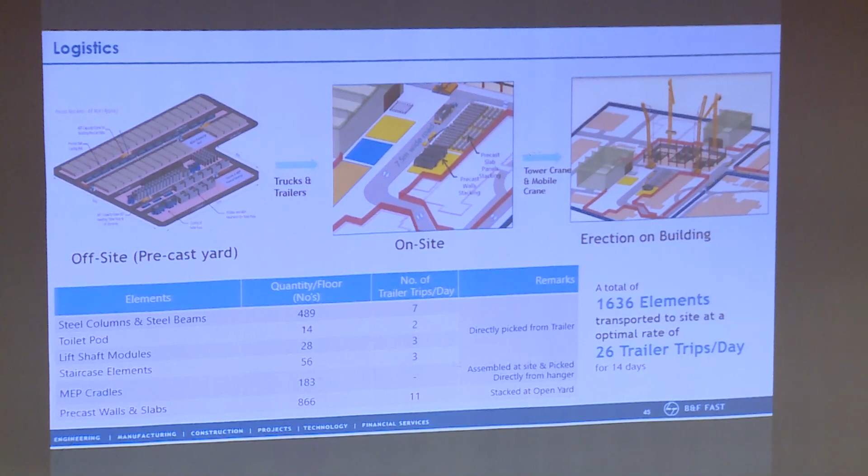We had to bring materials from all over the world, and we had to do a lot of logistics planning. We did it, and we brought the material to site. That is the logistics plan. I don't want to get into so much detail, and I think a movie will give you much more information.

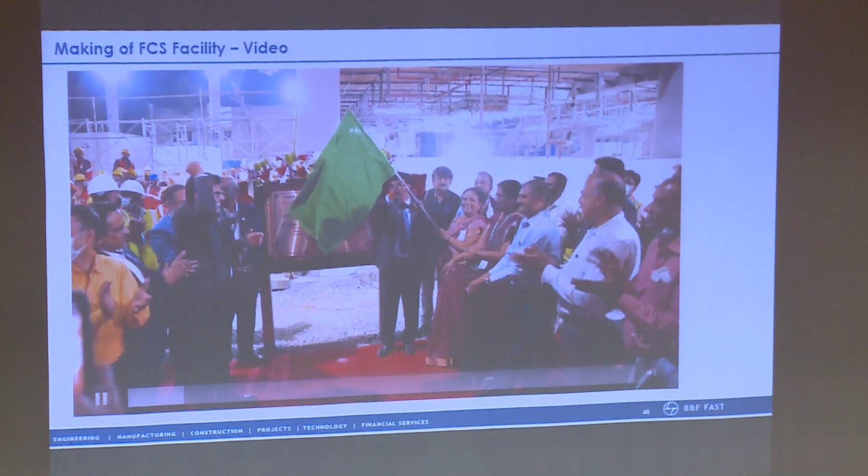Project FCS building of Aeronautical Development Establishment DRDO is launched now on 1st February at 00:00 hours 1 second.